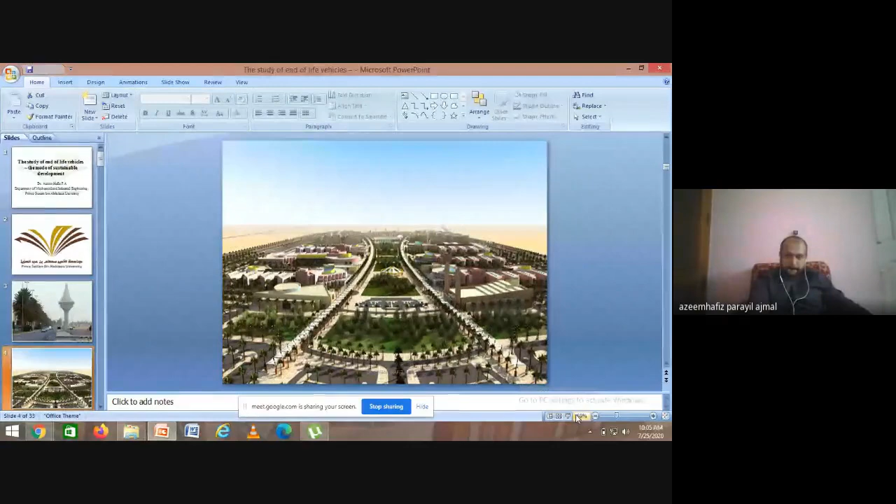We have plants all in Al Kharj, and we also have our university, Prince Sattam bin Abdulaziz University. You can see the aerial view. If you drive around the outside of this university, it will take you 10 or maybe 15 minutes to go one round through its perimeter. It's a very huge university, with maybe 4 or 5 affiliated campuses nearby in the Kharj area.

We have almost 9,000 students and 1,500 faculty members. We have College of Engineering, College of Pharmacy, College of Computer Science, Business Administration, and this is Mohammed bin Salman, the Crown Prince of Saudi Arabia.

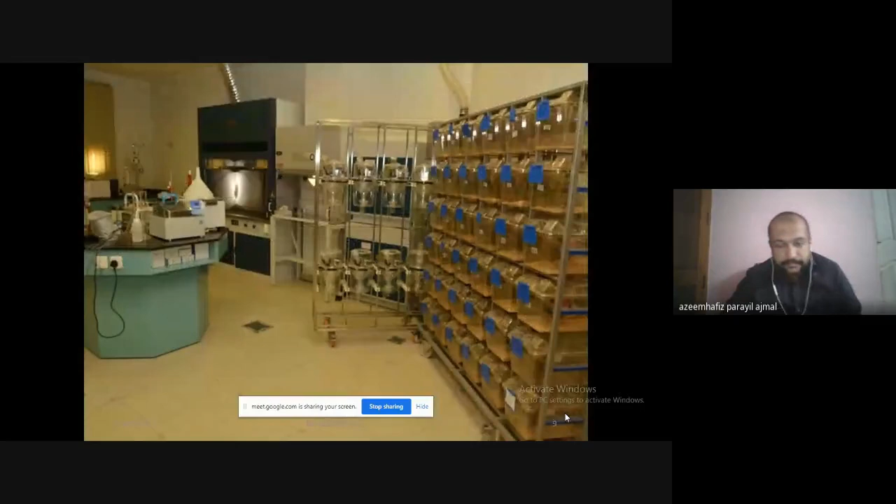He has a vision for 2030, that Saudi Arabia should become independent of natural resources like petroleum. So he has spent a lot of money on sustainable engineering processes, and we have got 300 million riyals, with many research setups implemented or installed in our university.

So I'm starting my class on the study of end-of-life vehicles, the mode of sustainable development. First of all, I learned that you are from Kerala University and you don't have the subject sustainability in engineering, which is a course for the KTU students. It's an open book exam.

What is sustainability? Sustainability is avoidance of depletion of natural resources in order to maintain an ecological balance. That means while you are doing any process, you should think about the future. It should not harm the human beings who come after you. The generation coming after you should not feel the consequences of programs you are implementing today.

We came to know that in the 2019 winter in Delhi, the fog was at its worst and the visibility was at its worst. Actually it is not just fog, it is smoke. Once the smoke and fog mix, the visibility gets even worse. This is because of too much polluted exhaust from vehicles and from industries.

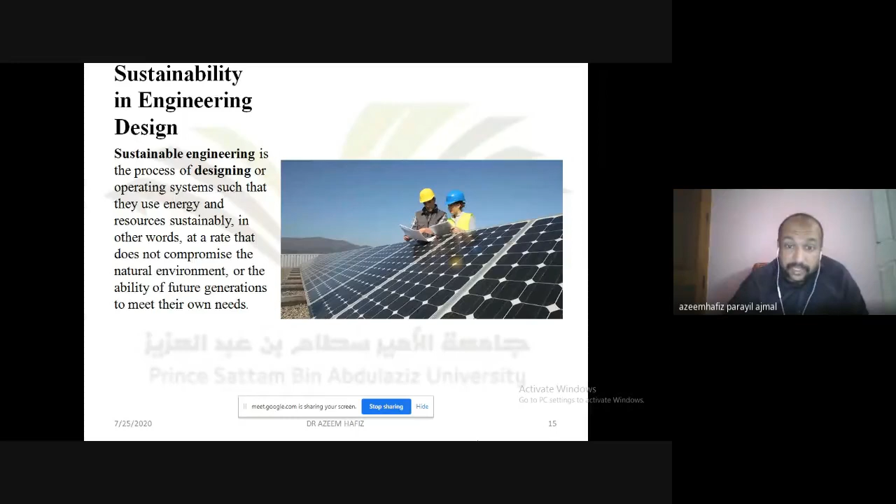We know we are also trying to shift into non-conventional energy sources like solar energy and wind energy. When solar and wind energy are used rather than conventional sources of energy, we will not harm future generations' needs, because we are using something which is of non-conventional type.

As you are from the electronics and communication department, I tried to find out how engineers of electronics and communication can contribute. The first one is optimizing the performance output, like a laptop or a computer. If you can maximize the battery life or the output of the device, energy will be conserved. Second is avoiding hazardous components. E-waste disposal is a huge issue coming in the future, so when making components you should try to minimize the use of hazardous materials like mercury, cadmium, etc. You should always have innovation in mind, how you can go for a sustainable design. Whenever you go for research or design, always think about how we can achieve a sustainable design, and go for greener alternatives in your innovation.

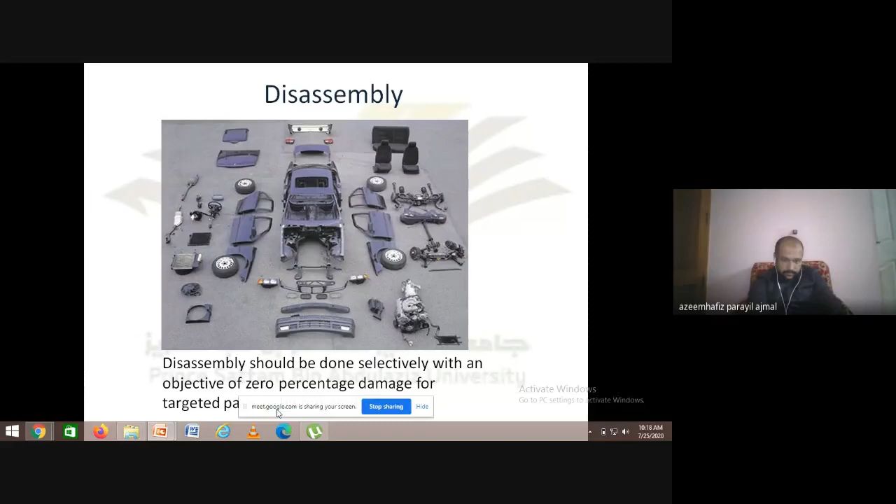Once there is remanufacturing and disassembly, the part should be obtained - whichever part we need - without any damage, so that we can again do some work and make it like new. That process is called refurbishing.

I think if you go to eBay.com you will get refurbished mobiles - mobile phones which you take for 20,000, 25,000 rupees. They take it as second hand, work on it, and again sell it as a refurbished mobile. I don't know whether it is still available now; in 2015 eBay had refurbished mobiles. So refurbishing is the making up or reworking on a component - that is called refurbishing.

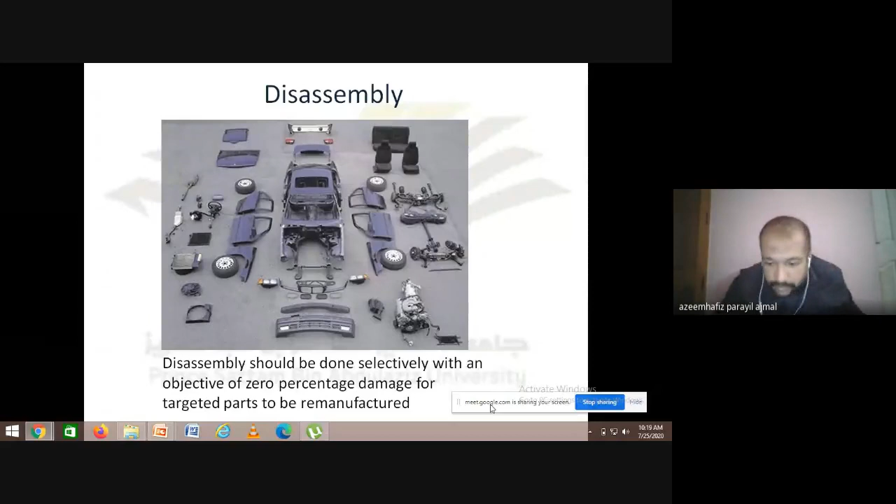The next term is remanufacturing. In remanufacturing, the products are brought back to the new condition or a better condition by reworking on the part, resulting in reduction of cost and savings in raw material consumption, machining process, and everything.

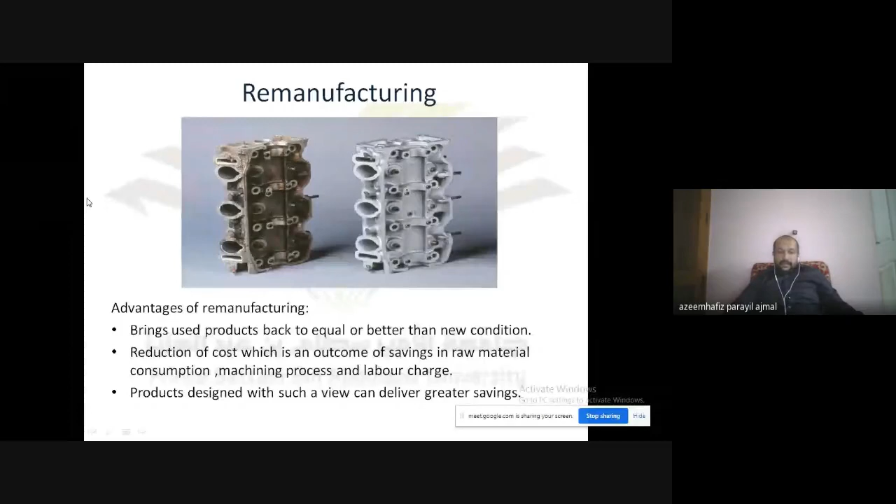If you are going to make this engine head from a new aluminum component, it will have too much cost. But when you convert the old component to a new component, you can do some heat treatment process to improve the material characteristics, and make it equally as good as the new product. So it gives you savings also.

Once you have an old vehicle which is almost reaching end of life - not like old vehicles in India, but in the European Union, after 14 years you cannot legally run that car on your roads - you have to do something, not just throw it away, because that is also an environmental issue. So the last owner, who will not have any money to dispose of this vehicle, can send it to the manufacturer. That is called free take back, and it is one of the implications of the end of life vehicles legislation.

Now we are going to discuss what is happening once end of life vehicle legislations are enforced globally, not in India. Globally, all automobile manufacturers are forced to take up some actions. For example, Toyota has done a lot of research and has brought high performance polypropylene, which is easily reusable material, and they have also developed thermoplastic polyurethane, that is TPU resin.

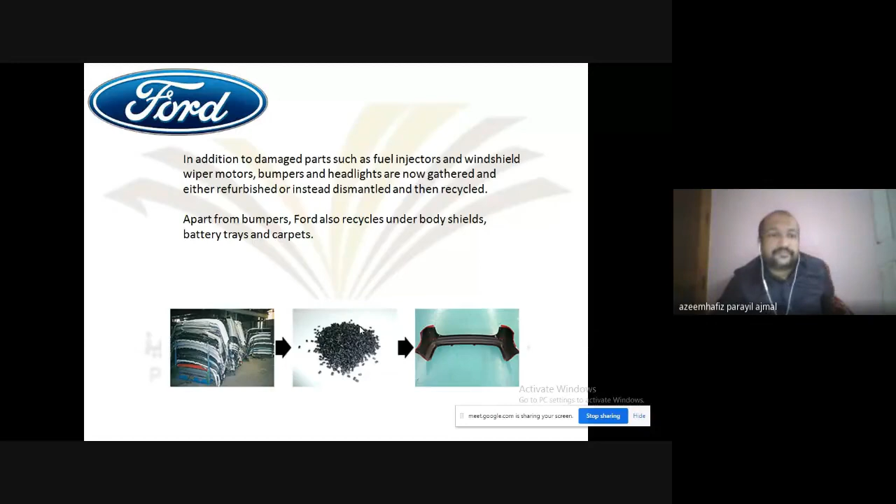Volkswagen has introduced an individual system that involves a direct contractual relationship between manufacturer, wholesaler, and reselling industry companies, and a collective system, where a third party is engaged to establish and maintain a joint venture take back network for all manufacturers and wholesalers.

And Hyundai, which is a Korean company, has set up the Namyang Research and Development Center in South Korea, which can strip a car down to its shell in 30 minutes.

I'm sorry. Excuse me.

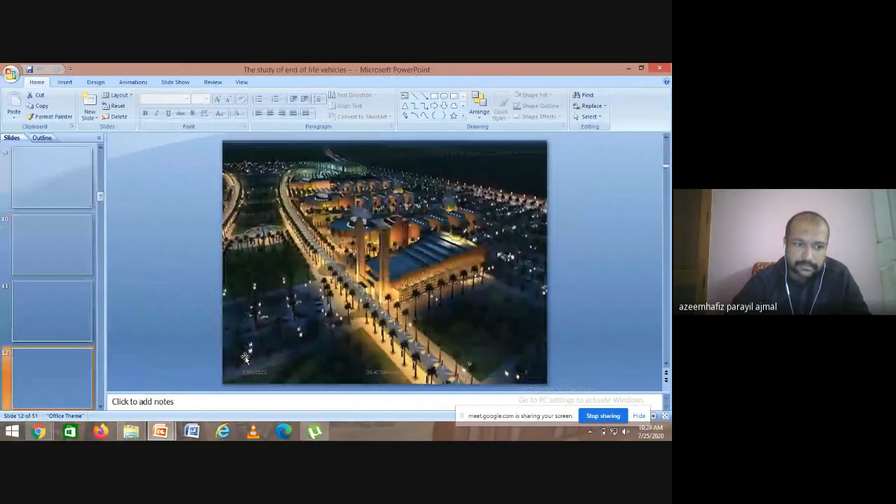So just to recap what we have told: sustainability means the design which has to come in engineering, which will not harm the future generation. So once we are going to sustainable design in electronics engineering, you have to think about avoiding the e-waste, and also going for maximum performance output of the components, as well as avoiding the hazardous components in manufacturing.

Then it's my topic, that is end of life vehicles. In end of life vehicles, we have something like end of life vehicle legislation. Legislation means it is a set of rules which will force the manufacturers like Toyota, Mitsubishi, Nissan to make something like a free take back, that is taking back the vehicle after its end of life.

Then we have the design for disassembly and remanufacturing. Design for disassembly and remanufacturing means we should have a design so that we can easily take the component back after its life, and we can see what is the problem with this component and how we can make it as good as a new component, and we can reuse it.

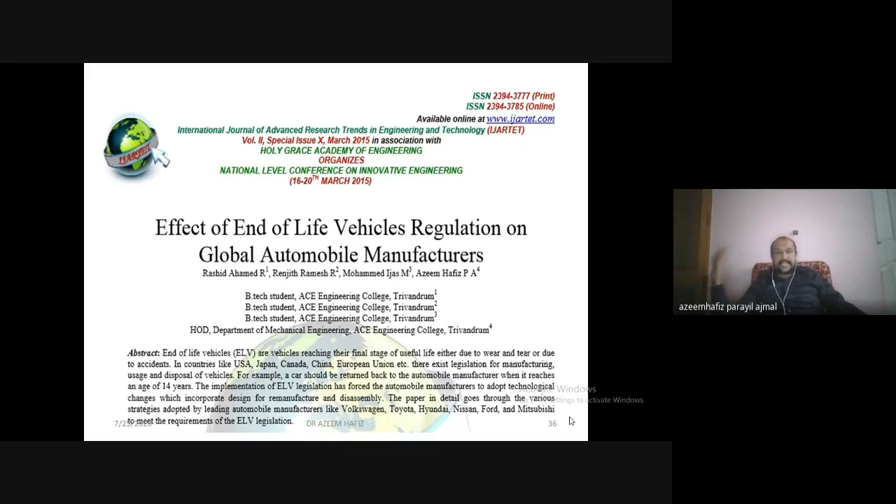Like you have our state of Kerala, and you have these end-of-life vehicles occurring. If we take the district of Trivandrum itself, we will have many parts like Nedumangad, Neyyattinkara, Parassala, Karakulam, Attingal. There are many parts in which these end-of-life vehicles are generated. Okay, so they are called collection points.

So you cannot set up a refurbishing center at every point. Refurbishing center means a remanufacturing center where you dismantle these cars and take out the parts and you make it as a new one. You cannot make a refurbishing center at every point. You should have a centralized refurbishing center.

For that, you should have a network where you should have the collection point and the refurbishing center. So that's a real logistics problem which comes in end of life vehicles management. So we have developed a decision support system so that you can enter the distance of your locality, and the decision support system will give an automated decision with some algorithms. This decision support system was developed by myself as part of my research, and it will give the solution of the location and position of the refurbishing center if we give our own data.

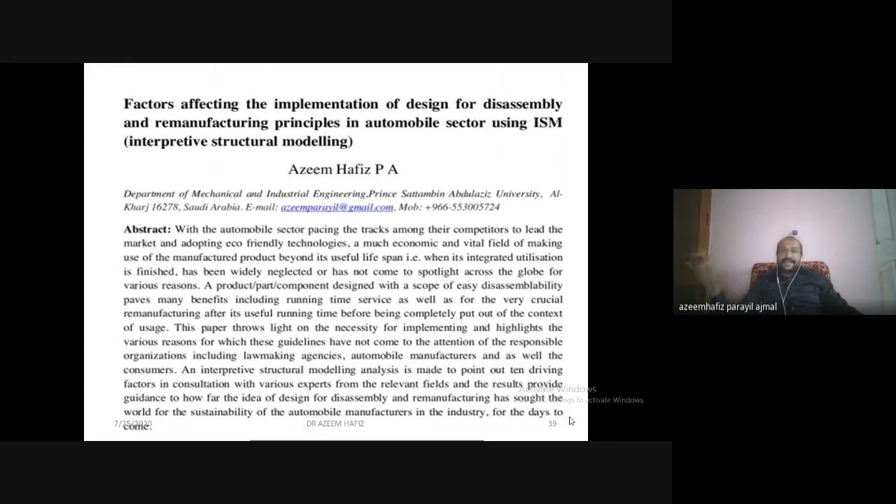If we are converting fuel cars into electrical cars, even then end of life vehicles will exist, because once this car also reaches 14 years, it is also going to become old. So how we can disassemble and remanufacture the parts of these cars is something we need to take up.

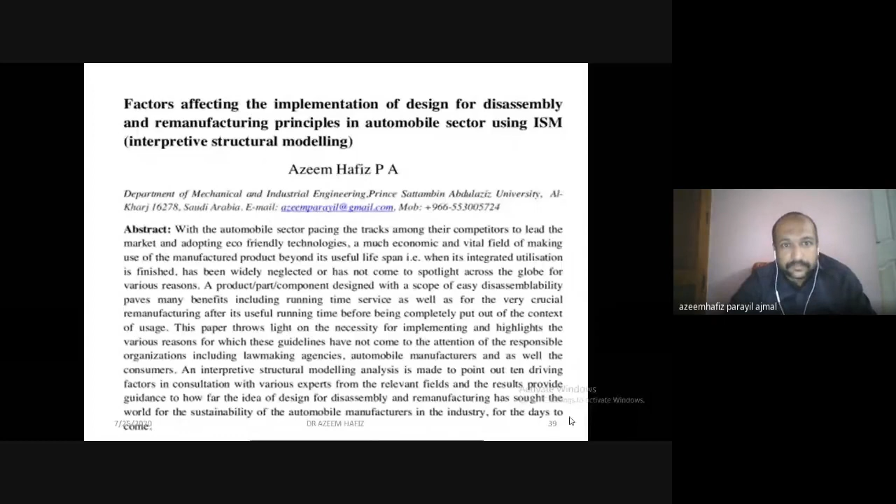As the lecture has been so boring till now, I will give a casual example about what is extended producer responsibility. Like you students - there's a student, his name is Bilal John Kurishingal. He is joining University College of Engineering as a first-year student. He has parents at home, and he is pampered by his parents. They provide him everything, and they have done everything for the boy, and he joins the college.

And then he gets into a friendship with one girl. Any name you can call her - maybe you can call her Nayantara. So Bilal John Kurishingal and Nayantara are very thick friends, and they spend 24 hours either by phone or when they are in college together. And he is so much engaged with that girl. Finally, they complete 4 years, and Nayantara gets married to an NRI American, and she leaves - now we are friends, okay bye.